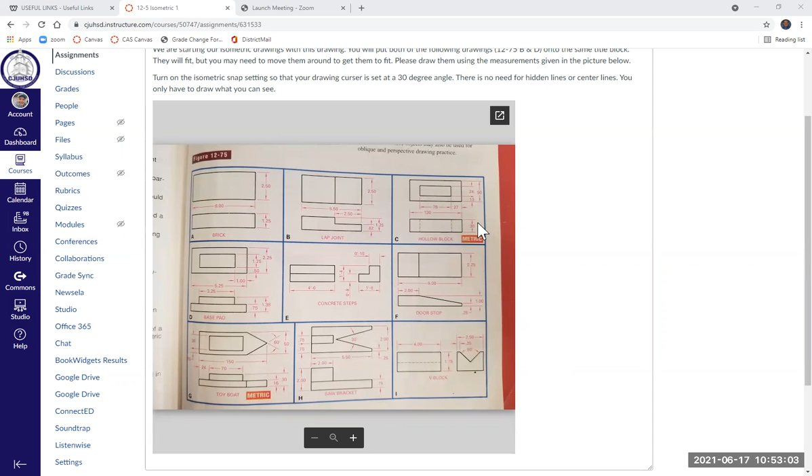All right, so for drawing 12-5, we're going to be starting an isometric drawing. And the assignment says that we're going to do drawing B and D. So this is figure 12-75, B and D. We're going to do them on the same title block page. They will fit. We may have to move them around a little bit, but they will fit.

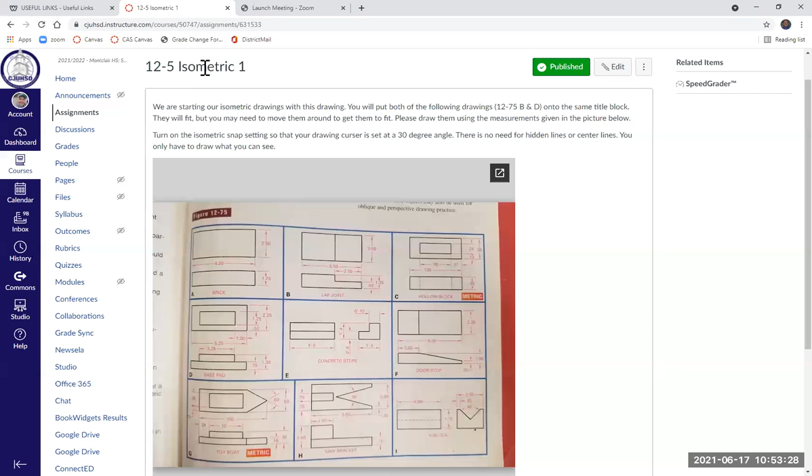And we're going to be drawing these as an isometric drawing. It says we have to turn on our isometric snap in the snap settings, which will set our cursor at a 30-degree angle. You'll have to use the F5 function key in order to turn your cursor in a different direction. You should probably write that in here.

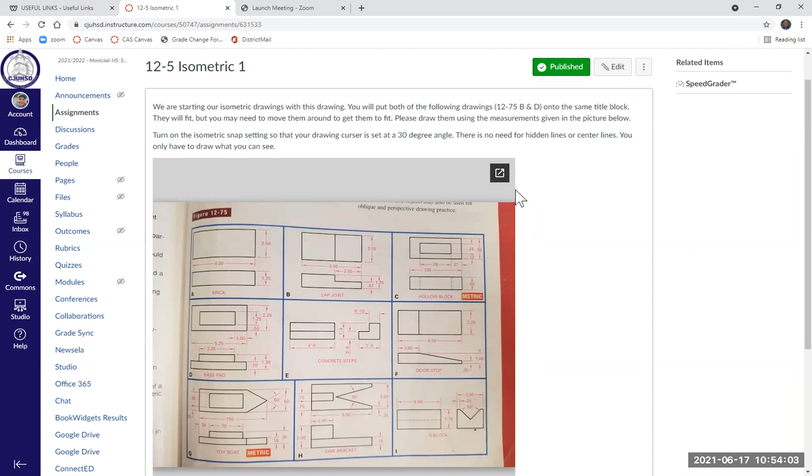The nice part about isometrics is you don't need any hidden lines, no center lines. What you see is what you get. So let us get into AutoCAD so that we can start this drawing.

Okay, so we're going to open up our AutoCAD and we are going to go straight down to our snap and our grid here. Click on the little caret that opens up the snap settings function. And we're going to turn on isometric snap. Okay, so we normally are on rectangular snap. We now just selected isometric snap. Click OK. And notice that that changes the angle of my mouse to a 30-degree angle.

If I hit F5, it changes the direction. If I hit F5 again, it's now pointing to the right in vertical. So you'll have to use the F5 function key several times throughout a drawing to turn it in the direction that you want to draw. Okay, so let's get into our assignment so that we can draw letter B, which is called the lap joint.

So it says that the lap joint is 5.5 inches long. So I'm going to start down here at the bottom. Line command, start near the bottom, I'm going to turn off snap. But you do have to make sure that ortho is turned on, because we want that to lock in at a 30-degree. And I'm going to go 5.5 for my length.

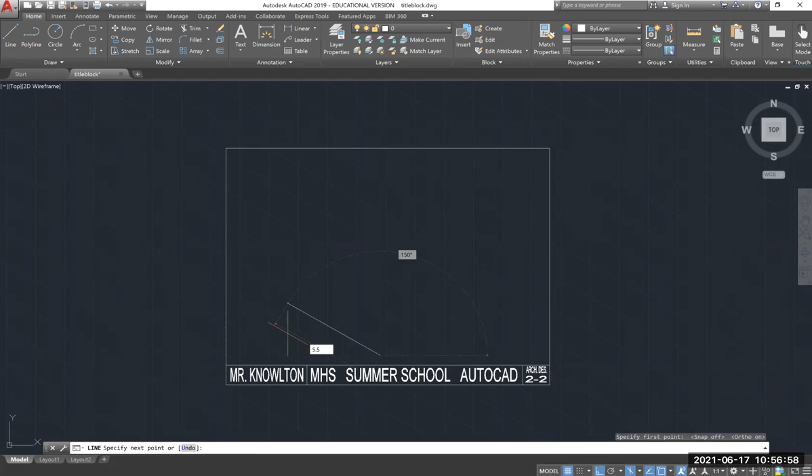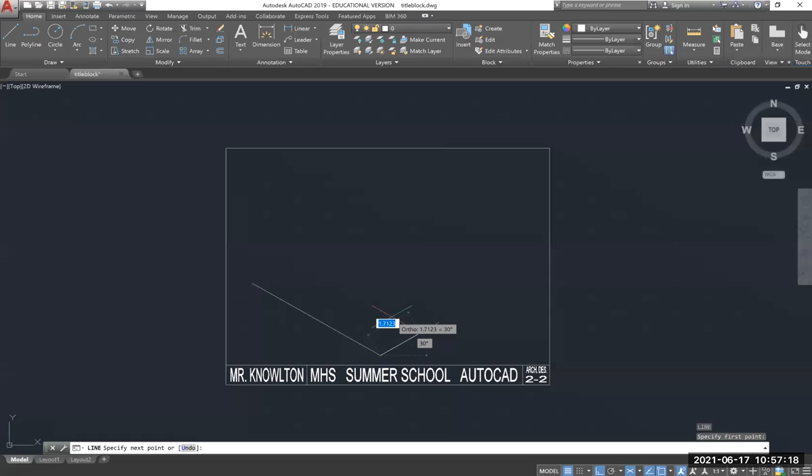F5, 2.5 for my width. And F5 again, my height of my first step of letter B is 0.62. So what I've just created is called an isometric axis. It's where the length, the width, and the height all meet in the same bottom front corner.

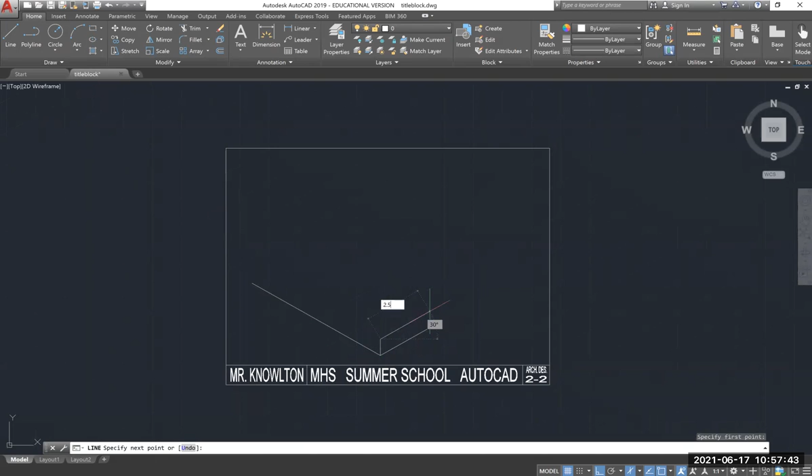From here over 2.5 and back down. From back, I'm going to go up 1.25. F5. This one back 2.5. This line forward. This line up until I cross, and then trim. This corner, hit F5, go this way, 2.5. As well, 2.5. And from here, 2.5.

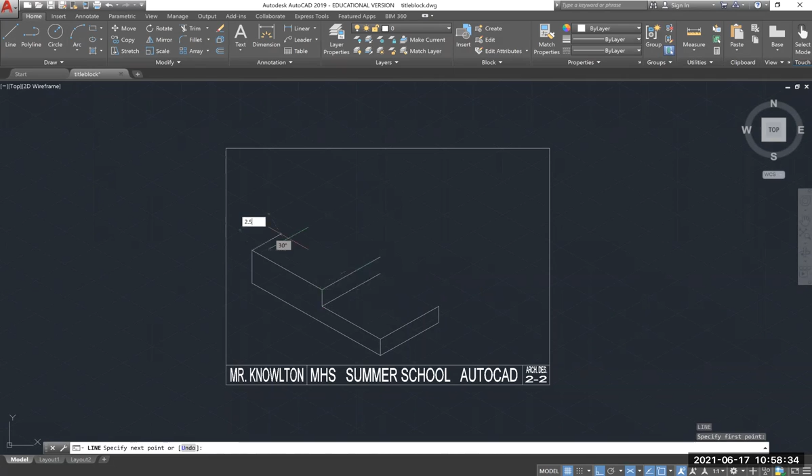That is letter B, figure 12-75B. Now, we're going to do letter D, as in David. And this one has two little blocks, the base block and then a smaller block sitting on top. The length of this is 5.25. The width is 2.25. And the height of the first block is 0.75.

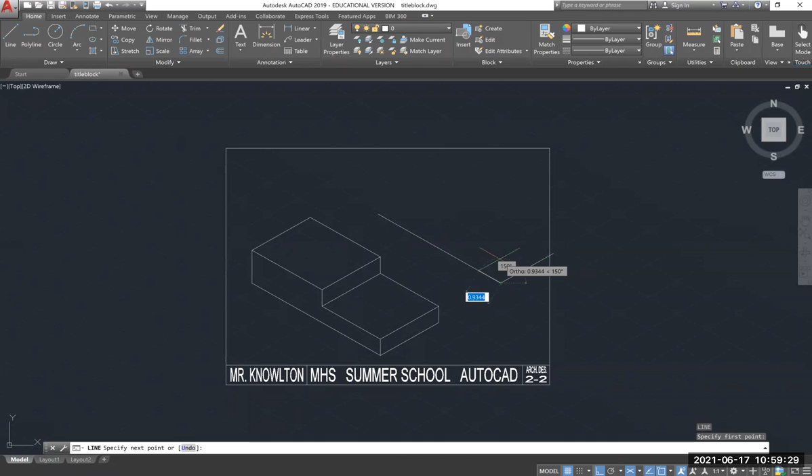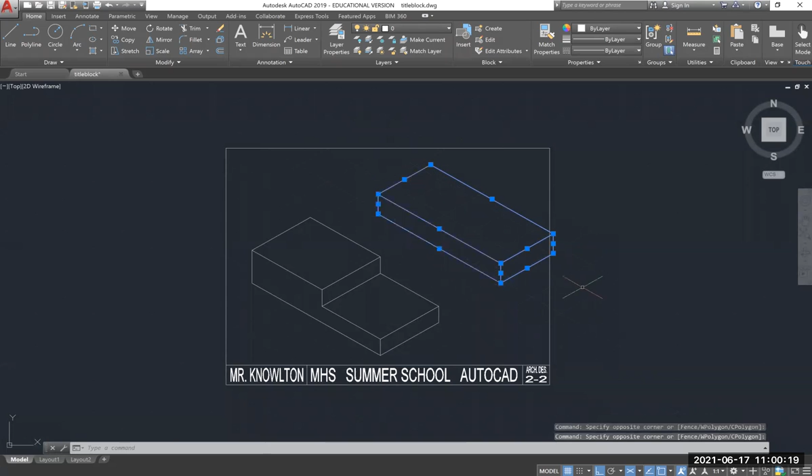2.25. The length is 5. Notice how I just drew those a little bit too long and then just trimmed them off. That way I didn't have to know the exact length. Now, I'm actually going to move this off here. We'll draw it and then we'll put it back on.

Here's our base pad, and there's another brick that sits right on top of it. The brick that sits on top of it is 1.25 wide and 3.25 long. And it says from this top corner, we have to go over 1/2 inch to the right and 1 inch to the left. And that will be the bottom left corner of that upper brick. So I'm just going to draw some reference lines. From this corner, I'm going to go over this way, 0.5. Then I'm going to go 1 inch this way. That corner right there is the base corner of the smaller brick.

And the smaller brick is, there we go, 1.25 by 3.25. Get rid of those little reference lines that I used. And the height of this, it says the height is 1.38 minus 0.75. So that would be 0.63. So I'm going to go up 0.63. Do that.

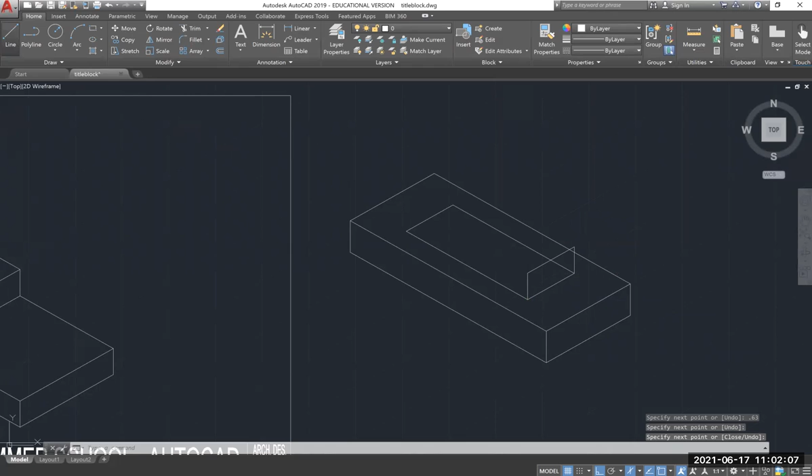3.25. Over. Actually trim this back edge because I can't see it. No hidden lines, just draw what you can see. Now I'm going to move this on. Turn off snap so I can move it in there. Okay. Here's letter B, here's letter D.

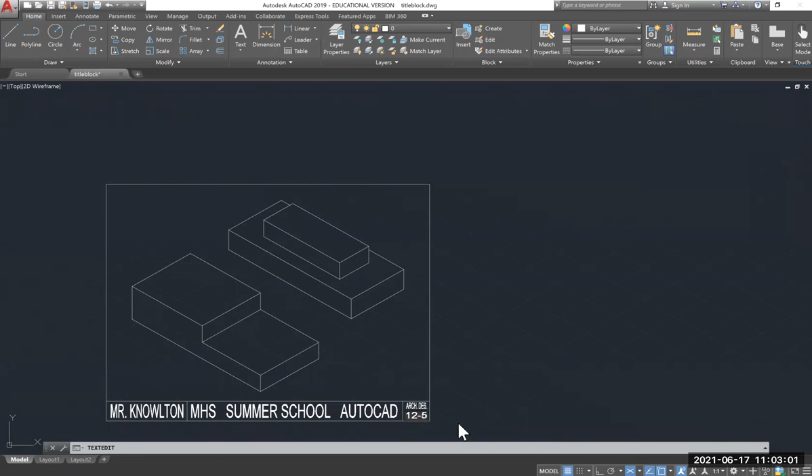This is going to be 12-5. And we're good to go. So that was helpful.